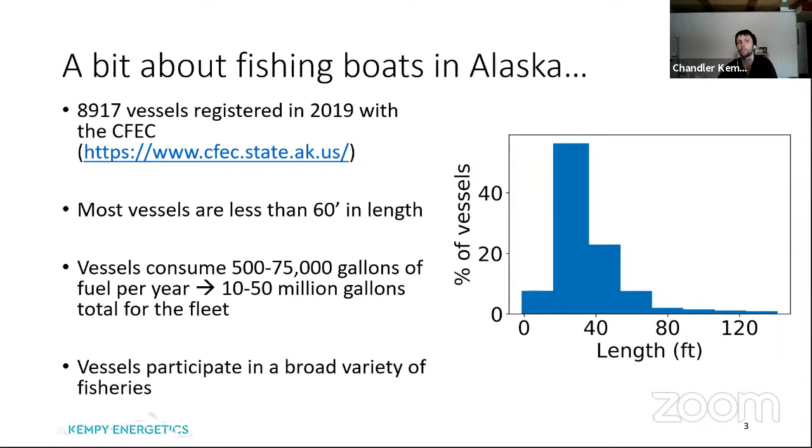For the rest of the presentation, I'm going to divide it into three sections. The first is going to go over measurements — how can we characterize the energy loads on a fishing boat. The second section will describe the results of the measurement campaigns I've been a part of, trying to quantify how energy is used in different fisheries. Finally, I'll try to take those results and ask how we can use our measurements to inform investment in alternative energy systems, and whether there are places where we might be able to start introducing an energy source other than diesel fuel into the fleet. So that's where we're headed.

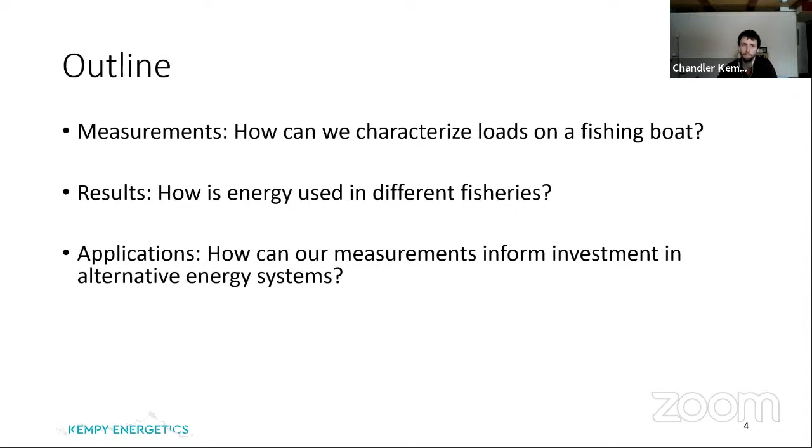So where does all the fuel go in a fishing boat? Well, the first thing we're going to measure is propulsion. Every vessel in the Alaska fishing fleet has a diesel engine that provides propulsion power. To measure fuel consumption, I've gone onto these vessels and installed fuel flow meters on both the supply and return fuel lines, which gives a real-time measure of fuel consumption.

I can also install a strain gauge on the propeller shaft. There are probably some mechanical engineers in the audience who know all about this, but a strain gauge is something you can glue to the shaft, and it measures how much the shaft twists when the propeller is turning. If we know the material the shaft is made out of and its diameter, we can use that twist to calculate the torque applied to the shaft. Combined with a measure of the rate of rotation of the shaft, this gives a direct measure of the power consumed by the propeller.

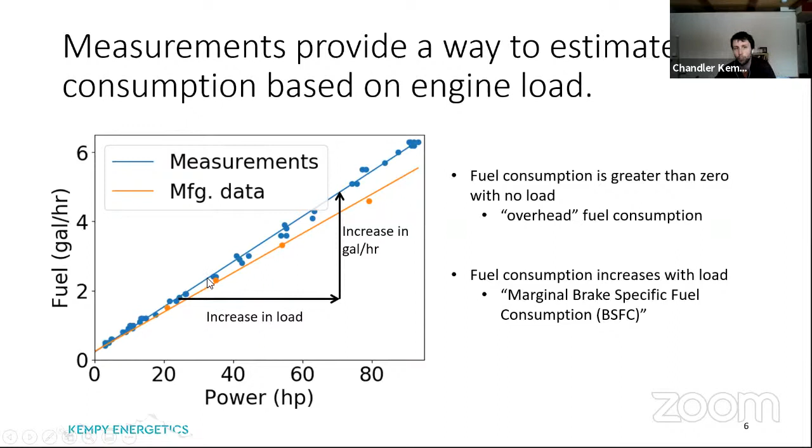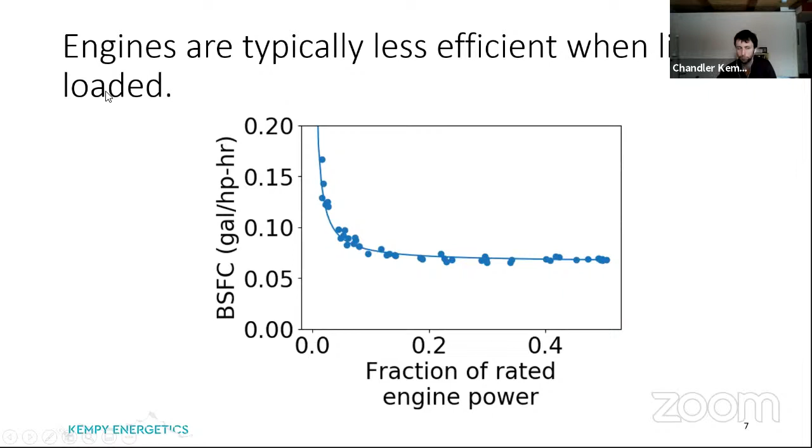I put hull speed in quotes because that concept is a bit more complicated than it's often presented as. But essentially, the hull speed is an estimate of when there will be constructive interference between a wave created by the bow of the vessel and the stern wave of the vessel. When there is constructive interference between those waves, the drag on the vessel increases rapidly with speed.

You can see that having stabilizers deployed increases the fuel consumption, or increases the power required to achieve a particular speed. It's especially significant at lower speeds, but it can be a large increase in the power requirements at any speed, really.

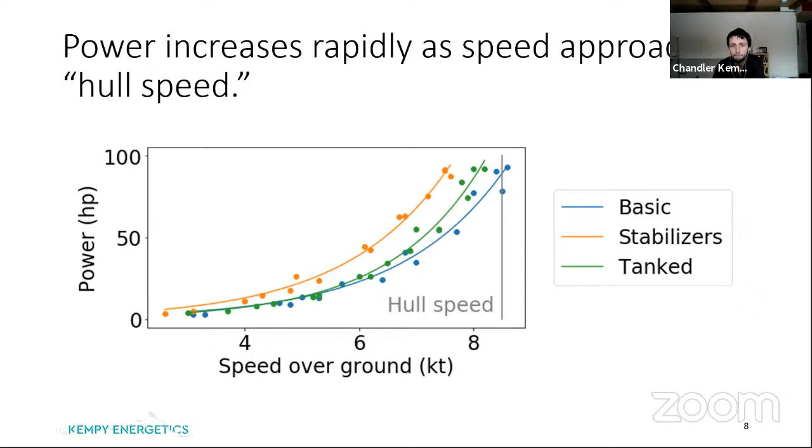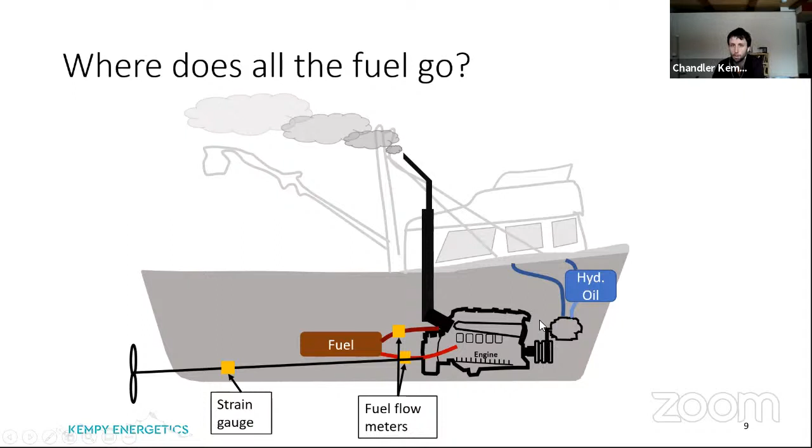So there are several other types of loads on the engine that I'll go through in less detail. Almost every fishing vessel has hydraulic loads - things that reel in a fishing line, haul a net, or set a crab pot. The hydraulics are typically powered by the main propulsion engine, and to measure the energy they require, I've installed pressure sensors on the high pressure side of the hydraulic system. We combine that measured pressure with an estimate of flow based on the speed and displacement of the pump to get a measurement of the power consumed by the hydraulics.

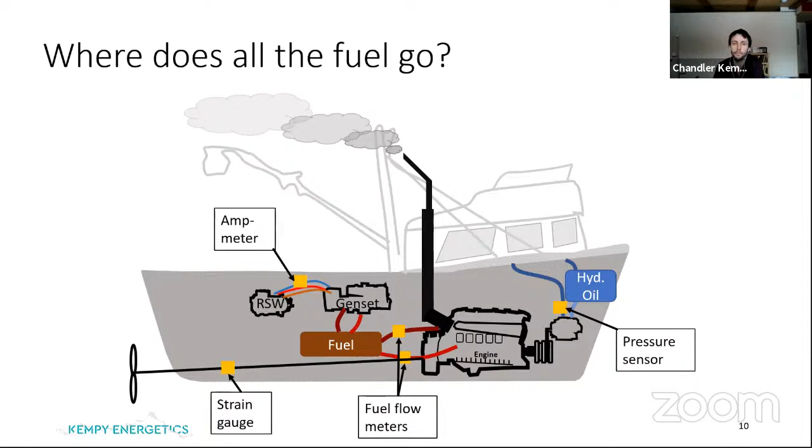The next load class is refrigeration. Many vessels use refrigeration systems to chill the fish once they're on board, and they can be powered in a variety of ways - sometimes with an auxiliary electric generator, sometimes with a mechanical coupling to an auxiliary engine, and sometimes even driven through the hydraulic system. In the example I'm showing here, we have an auxiliary electric generator, and we've installed an amp meter on one of the leads to the compressor to measure how much energy it's consuming. We also measure the voltage and power factor to get an accurate estimate of energy consumed.

Finally, every vessel is going to have an alternator. This will be driven again by the propulsion engine, and it's used to charge batteries, supply hotel loads, perhaps even power an inverter that supplies 110 AC to electronics on board. With that, we can measure the voltage and log the amperage over time to determine how much energy is consumed by the electrical systems.

So that's an overview of the type of energy consumption or energy loads on fishing vessels - propulsion, refrigeration, hydraulics, and electrical loads. We combine measurements of these loads with measurements of fuel consumption to get an efficiency of the engine, and also use it to estimate how much we could reduce fuel consumption by considering alternative systems.

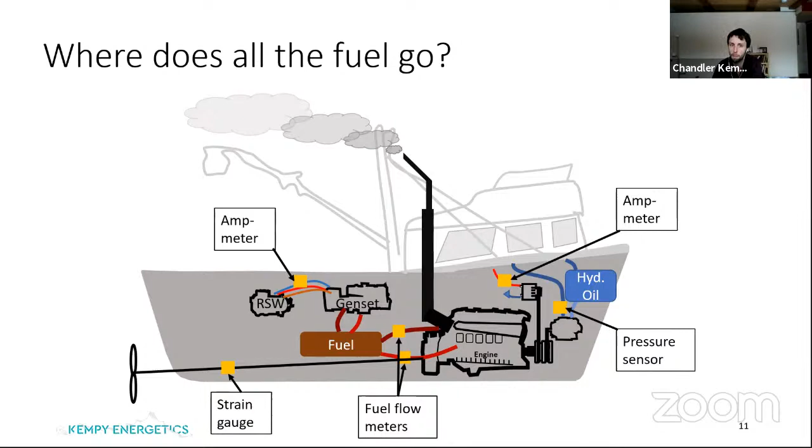The data I'm going to show in the next section is based on work I've done with dozens of vessels over the last 4 years. Through the Longline Fishermen's Association, we've worked with vessels to conduct sea trials on 29 vessels. In those sea trials, we measure all the loads I showed and operate the vessel at different speeds, measuring the power requirements at those speeds.

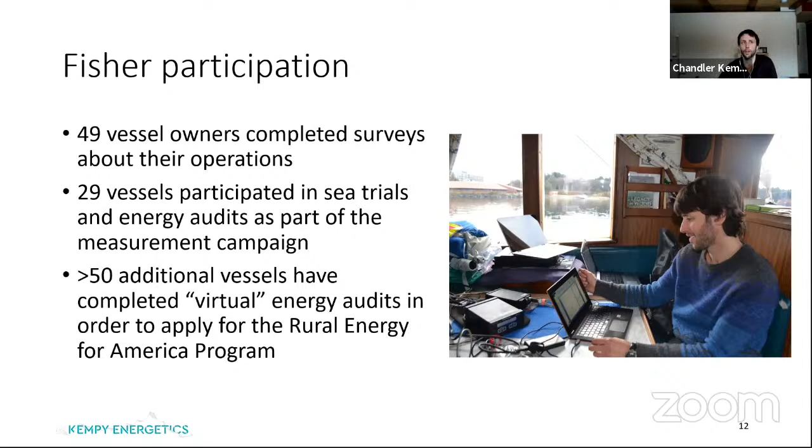In addition to those sea trials, we completed surveys with 49 other operators about how they use their vessel - how fast do they operate, how fast do they go in transit when headed to the fishing grounds, or how many hours a day do they spend hauling gear - these types of questions. I've also helped over 50 other vessels apply to the Rural Energy for America program, which is available to fishermen who want to make improvements on their vessel that will reduce fuel consumption. It requires a quantitative estimate of the impact on fuel consumption of the retrofits. This is the summary of the work I've done to inform what energy loads are on fishing vessels.

I'll pause here briefly and see if there are any questions. I'll just give it a second here. If not, I'll move on to the next section where I want to present results from these measurement campaigns I just described.

I've got a quick question. So you've just described the various different loads from propulsion to using auxiliary power for other systems. When it comes to your research and what you've been looking at, does it make sense to try to separate those systems so that some of the auxiliary load, for instance, could use solar or something like that, and the propulsion kind of remain the same - if that has a profound impact or not?

Yeah, that's a good question. I think that regardless of where these loads are coming from, they're increasing fuel consumption from the engine. So if we think back to that linear plot of fuel consumption as a function of load, whether you're increasing the load by turning on a light in the cabin or by increasing the speed of the vessel by a tenth of a knot, either way you're going to increase the fuel consumption rate of the engine by a similar amount.

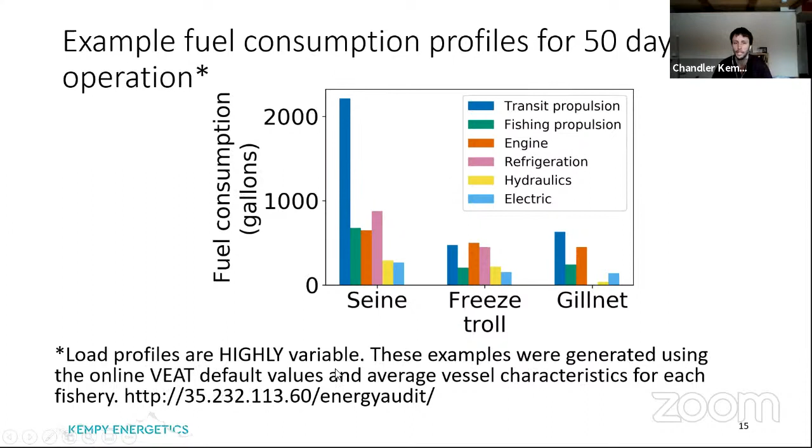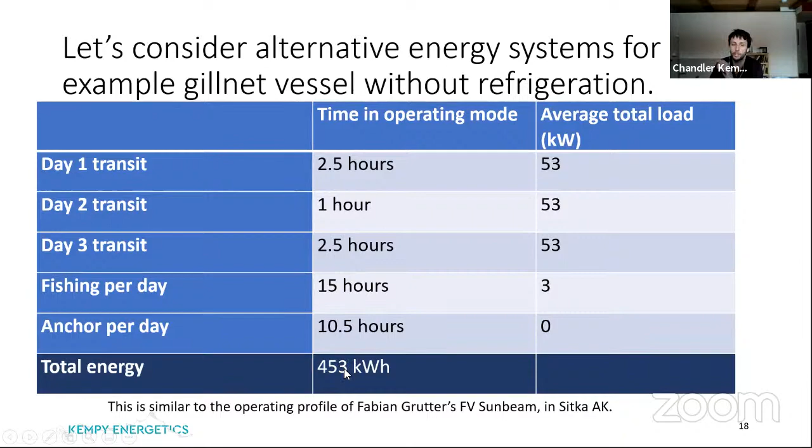And while they're fishing, I'm going to say they have a really efficient operation, so they're only consuming 3 kilowatts while fishing. If we do the math, that ends up being a total of 453 kilowatt hours for this 3-day fishing trip. I really want to emphasize here that this is a best case scenario for battery power. It's a short transit time, a short duration trip, and the load while fishing is very small. So it's a best case scenario, but it's also not unrealistic.

The operating profile is really similar to the Sunbeam, which is a gillnetter owned by Fabian Grutter in Sitka. He's actually installed around a 70 kilowatt hour battery bank in his boat to try to start introducing alternative energy into his operation.

So first, with this load profile that we're imagining, let's think about what a fully battery electric system would look like. We need 453 kilowatt hours of energy, that's without any safety margin, so bare minimum. The appropriate battery for this would be maybe a lithium iron phosphate battery, which could be a good fit, or a similar chemistry, or there are a few other chemistries I might consider. But the bottom line is these batteries are going to cost somewhere between $300 and $800 per kilowatt hour.

You might get $300 per kilowatt hour if you're buying more or less directly from the manufacturer with very little support, and certainly nothing to marinize those batteries. And then $800 per kilowatt hour is the price you might get for something like the battery pictured at the right, which is specifically manufactured by Torqeedo and BMW for use in electric boats.

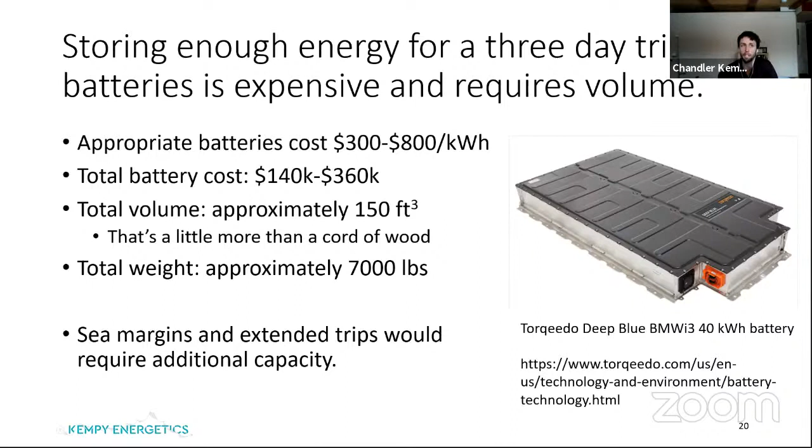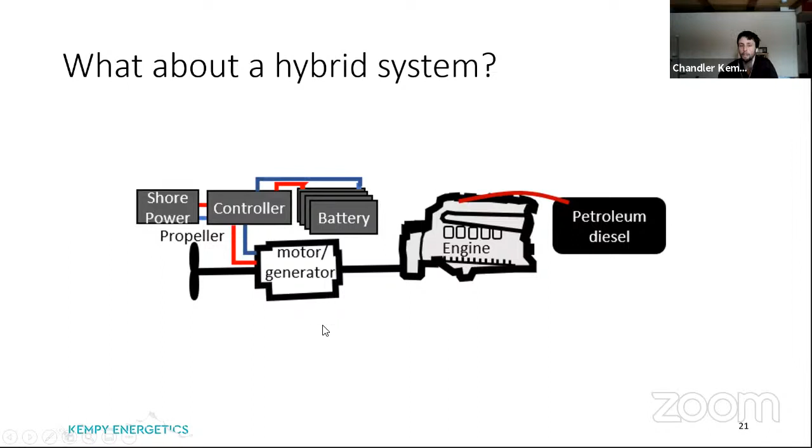So now I want to shift to thinking about a hybrid system. What I mean by that is a system where you have a diesel engine in series with an electric motor generator, where either the engine or the motor can provide power to the propeller. I call it a motor generator because it needs to be able to either consume electricity from the battery system in order to provide power to the propeller, or consume mechanical power from the engine and push charge back into the battery. In addition, we want to be able to plug into shore power when you're at the dock. So this is the type of system I'm thinking of when I say a hybrid system. There's other types of hybrid systems, but I won't go into those now.

The main motivation for fishermen that are interested in this is they want to try to make their operation more sustainable, so the amount of fuel they can save is a critical thing to think about. They may also be interested in being able to have a quiet operation while they're fishing, and have a redundant propulsion source. But the primary thing we're going to think about is fuel savings.

So a hybrid drive system can save fuel in two ways. First, by bringing power from shore—you charge the batteries at shore, you can use that power when you're at sea, and that will displace fuel consumption.

And then the second thing is that if you can use the hybrid system to improve the efficiency of the engine operation. I've got this plot on the left here—it's the same plot from earlier in the presentation, but I want to remind you of this inefficient operation when the engine's very lightly loaded. And then I want you to keep that in mind when you look at the second plot, which is the imagined load profile for this example.

So in this load profile, you start off going into transit out to the fishing grounds, consuming about 50 kilowatts. But then once you're fishing, you're all the way down at 3 kilowatts for 15 hours. Then you have a short 30-minute transit period back to where you want to anchor, and then zero load—you can turn the engine off, whether you have a hybrid system or not, when you're at anchor there. And then this cycle continues.

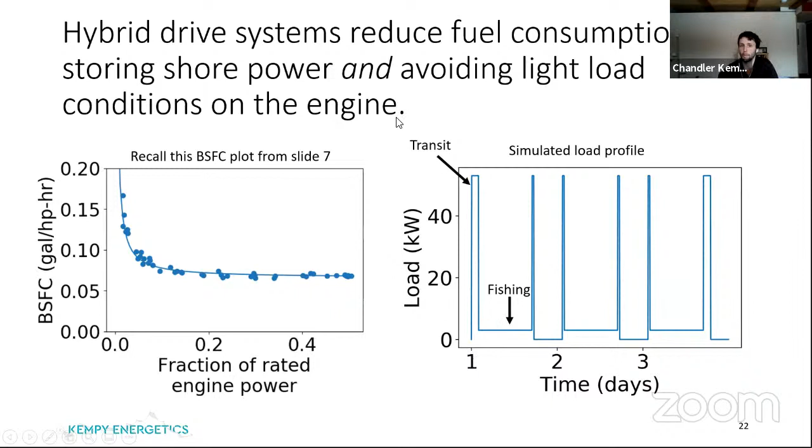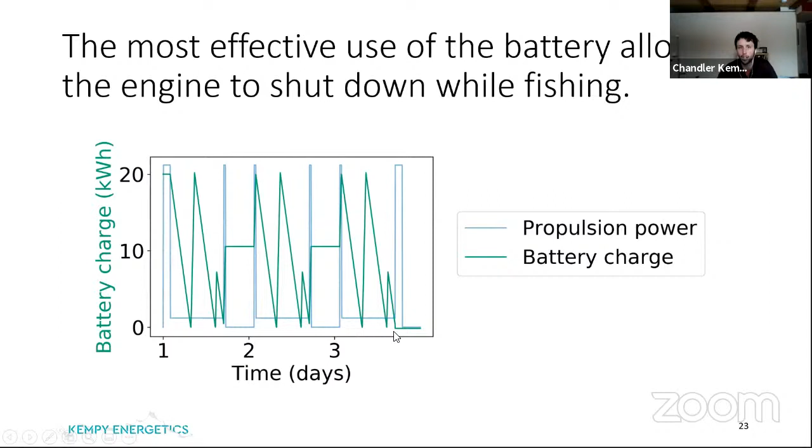So it's a good time to charge the battery so that you don't have to run the engine at all while you're fishing. So that's the concept of how this type of system would be used.

Now we can look at fuel consumption through time. The orange is with a hybrid system, and the pink is without a hybrid system. If we start at time 0 and look at the pink, we're consuming a lot of fuel to get out to the fishing grounds, and then while we're fishing, we're consuming relatively a lesser amount, and then it peaks again for each transit period.

If we consider a case with the hybrid, it's the same in that first transit period because the battery's already charged at the dock. But then once you start fishing, you can turn the engine off, and you only have to turn it on for these short times to charge the batteries. At least that's the concept in this simulation. And then finally, when you're in transit, your fuel consumption increases beyond what it would normally be to provide extra power to charge the batteries.

And there's a few efficiency factors included here to try to make this realistic. So you can see while you're charging, you're consuming more fuel, but then while you're fishing, you're generally consuming less fuel. In the end, if you add up all the fuel consumption, you end up consuming less fuel with the hybrid system, even after accounting for the inefficiencies of charging and discharging the batteries.

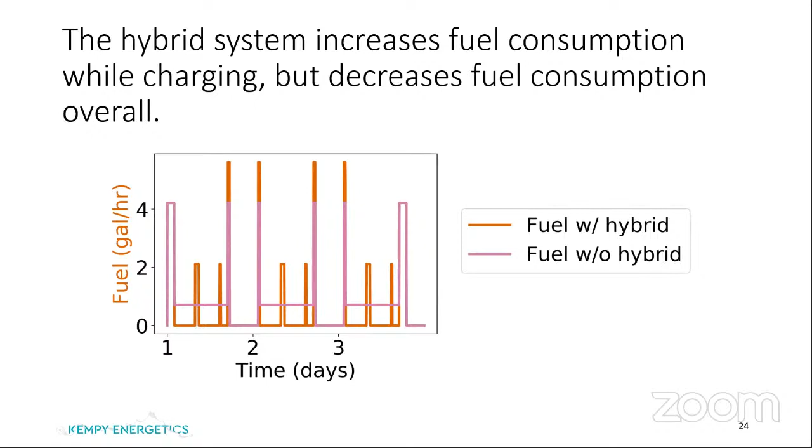Is there a percentage that you can put on that? Yeah, I think, is it the next? Yes, the next slide here starts to address that.

So here I have battery capacity on the x-axis and fuel consumption for this 3-day trip on the y-axis. The pink line at the top is how much fuel I would estimate the vessel to consume without a hybrid system. And the orange curve is how much fuel I'd estimate the vessel to consume with a hybrid system, at the capacity indicated on the x-axis.

So you can see the orange curve starts with a 20 kilowatt hour battery, just what I was describing in the previous slide. And the fuel savings estimate there is around 30% of the fuel consumption for the trip. That's due a little bit to the energy you're taking from shore, but mostly due to improving the efficiency of the engine operation, avoiding all that time when the engine is very lightly loaded.

And then as you increase the battery capacity further, you continue to decrease the amount of fuel that's required. So I think that should be intuitive—the more electricity, the more fuel you're able to displace. And the final point here is if you zoom in at the beginning of this curve, as you're increasing the battery capacity up until you have enough to get through 1 day of fishing, you get a slightly more bang for your buck during that period than you do once you already have that first day of fishing covered and you're just displacing additional fuel with electricity.

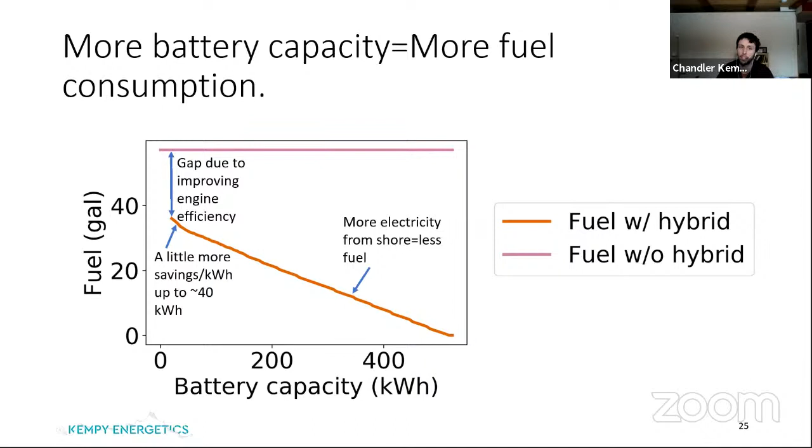Let's see. So I think I want to wrap up here so that there's time for questions. But I wanted to mention that there's a variety of other technologies we can consider that I haven't gone into today.

So the next few steps I'm working on, including some work with Mohammed: first, we're launching some measurement campaigns on troll and longline vessels this spring, and those vessels are hoping to install hybrid systems next winter. We'll measure the fuel consumption over the season this year, and then measure it again.

Once they've installed the hybrid systems, we hope to validate some of the modeling results. We're also working toward doing some real-time hardware-in-the-loop testing and simulation of marine microgrids, similar to how a microgrid in an isolated community might be tested for robustness to faults. We want to do similar testing for vessels as they rely more and more on electrical power.

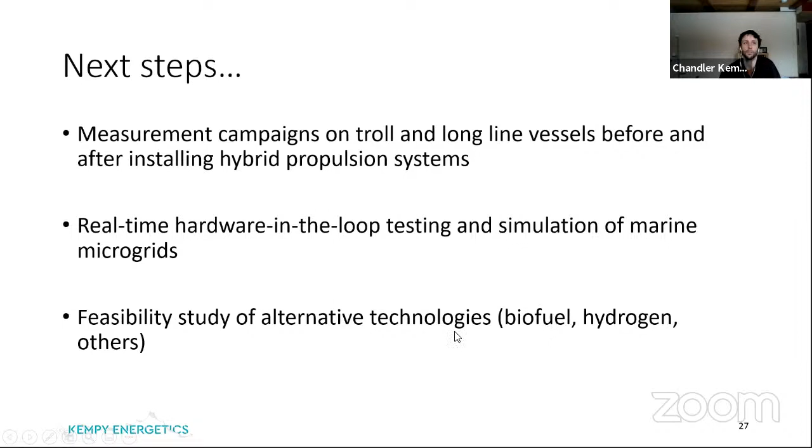And then finally, I want to look into the feasibility of alternative technologies besides batteries. I haven't done that much, but I'm interested in investigating biofuel and hydrogen and a few other technologies as well.

So to answer the question from the title: is it time for an energy transition in the fishing fleet? Well, it's not time to go to a fully battery electric fishing fleet, but we can start to introduce alternative energy to the fleet by thinking about hybrid propulsion systems. With that, I'll stop and see if there are any questions.

Indeed, we do have a question from chat. It says: have you considered and modeled adding renewable hydro, solar, and/or wind in addition to the hybrid system? I feel like you kind of covered that, but I wanted to ask the question anyway.

So the question was have I considered adding hydro, solar, or wind as part of the system in addition to hybrid systems. I briefly mentioned solar and alluded to thinking that the amount of energy you can capture while fishing is going to be hard to have a big impact on fuel consumption.

For hydro, I think that's really a lot of the reason that any sort of energy storage system on the boat could make sense, because many of the fishing communities in Alaska, like Sitka, Juneau, Haines, or Kodiak, have hydroelectric power installed on shore, so there's a relatively affordable source of electricity available. Although, of course, we need to think about if there were a large-scale transition in the fleet, how that additional load would affect the community's electrical grid.

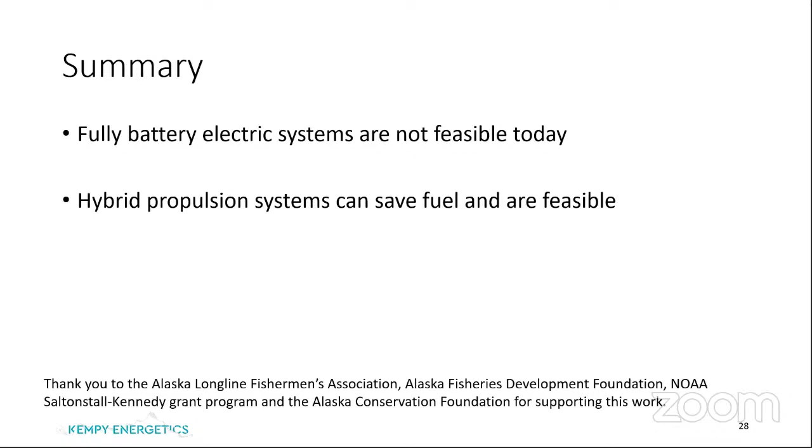I don't think there'd really be a good way to get away from the engine entirely for propulsion, but is it feasible that you would have an electric motor, essentially something that you'd use diesel to recharge, kind of like in your hybrid model, but you would never use the engine for propulsion? It would always be run from battery.

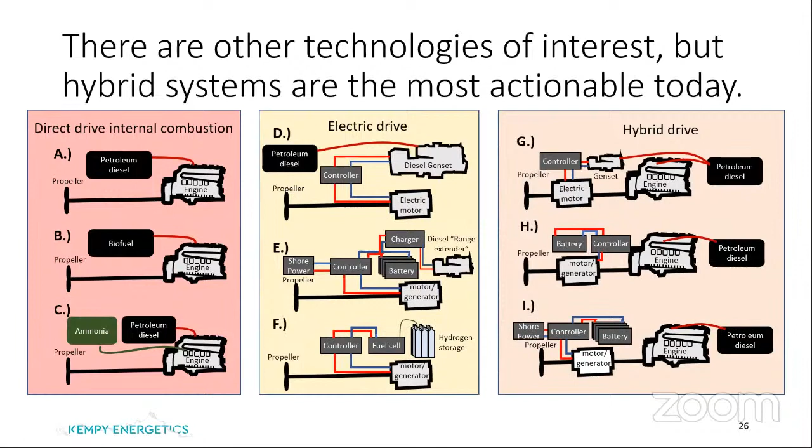So what do you think can be done on the shore power system side to help more fleets move to battery electric systems? I think you kind of answered that question, but maybe you could give us more detail, like what extra burden could charging the batteries be for the shore microgrids and shore power systems?

Yeah, so the good news is, in some of the larger harbors, there's already 30 or 50 amp, 240 volt power available at many of the stalls. And with that much power, you can charge - it's kind of like a level 2 charger for an electric vehicle. So there's reasonable charging capacity there.

And the second piece of good news is, if we think about a few boats - in the example I just showed, it's like 450 kilowatt hours for a 3-day trip - that's a pretty small impact on a grid the size of, say, Sitka, Alaska, which is not a big town, about 9,000 people. So if there's just a few boats doing this, it's a small impact on the grid, and there's already enough power available at some of the stalls in the harbor for reasonable charging times.

That being said, if we want to think about a larger scale transition in the fleet, many of these communities are already close to the capacity available from their hydroelectric systems. And so making sure there's capacity available to make this transition could be important.

I want to be careful saying that, because I want to acknowledge that developing new capacity often has its own negative impacts that need to be weighed against the benefits of how additional electricity could be displacing diesel fuel. So that's one potential thing communities could do to help support this - ensuring there's capacity available.

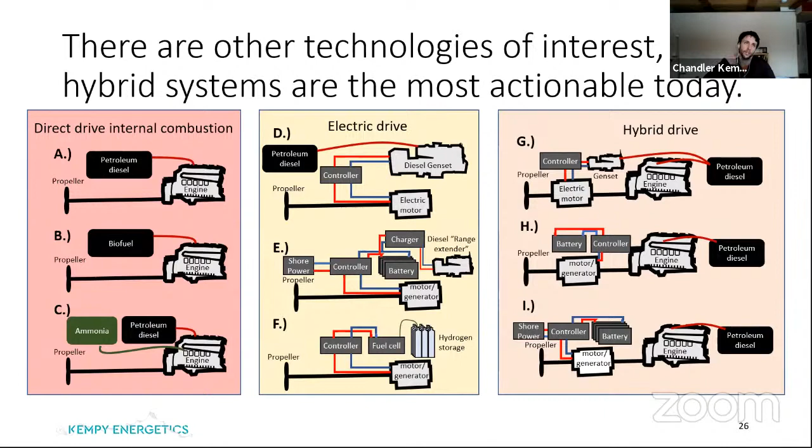Thank you very much.